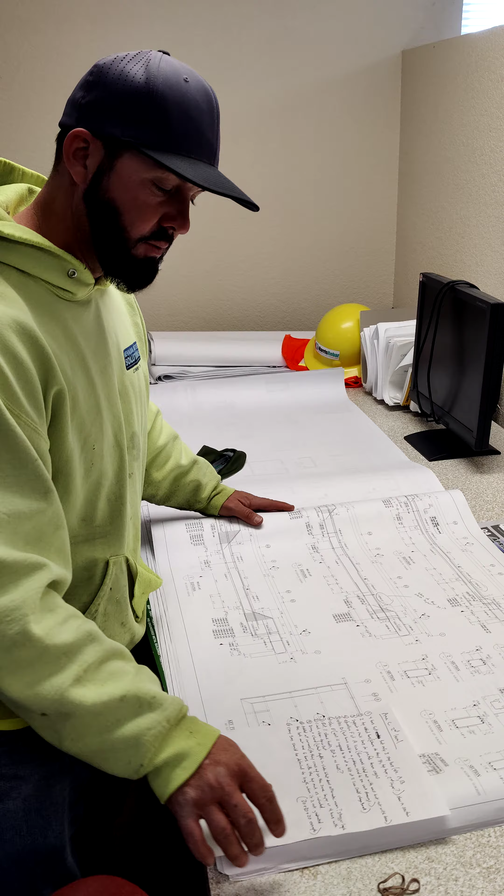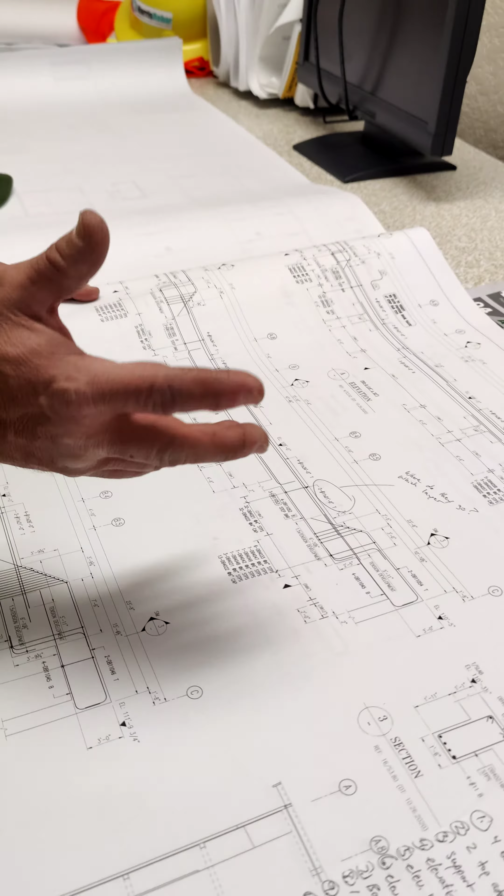We're looking at Area C second level deck. Just some things that I'm noticing on these drawings. The first one is on beam elevations A and B. We're calling out 3 step bars, but we have 4 bars in the bottom. I'm sure you guys are right. Just something I noticed. Want to make sure that that's right.

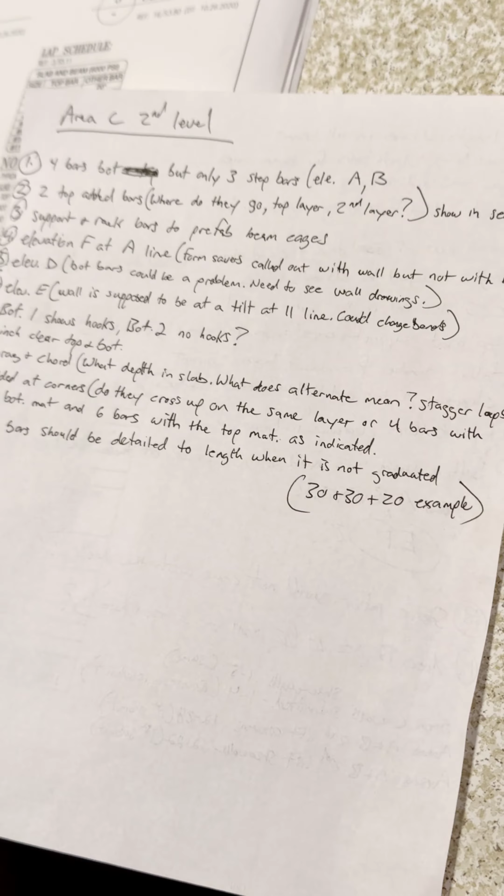The other thing is these added bars that we're calling out in the top. All these things are similar to the last video for A and B. Like, where do these 2 number 11s go? I look at your section cut and I don't see them there. So do they go in the same layer as those 4? Do they go underneath as a second layer? Just something that needs to be put in the section cut so that I know where they go.

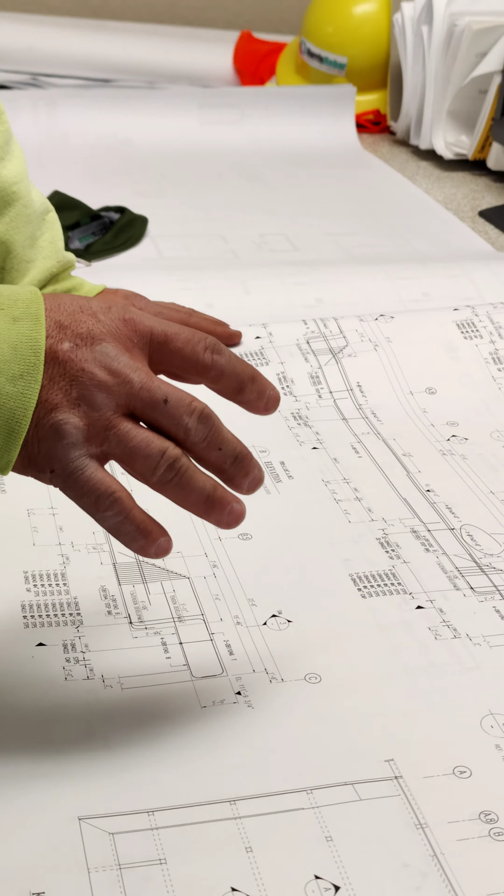Every time we have beams, especially when they're a stirrup and cap, we're always going to need support bars to build the cages and rack bars. So 2 rack bars for every beam cage, and then some number 4s or number 5 support bars, 4 per cage. Similar to what we did at the sphere. Same thing should be for A and B, and that's pretty typical.

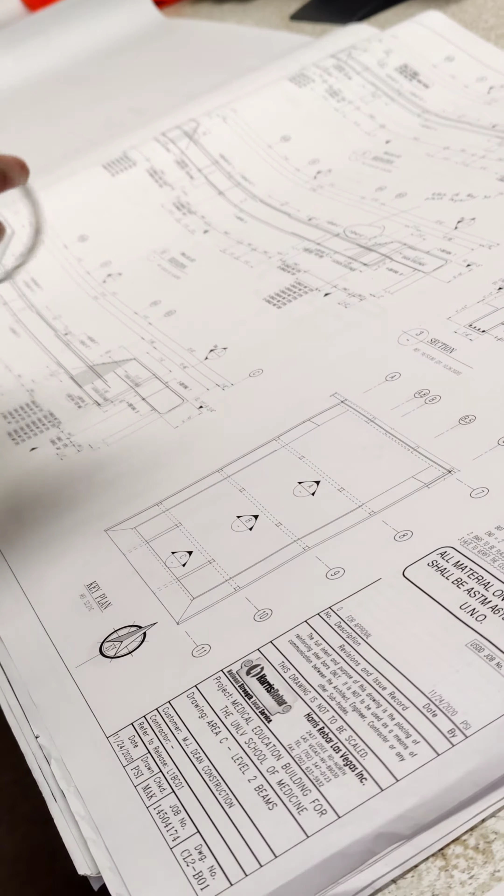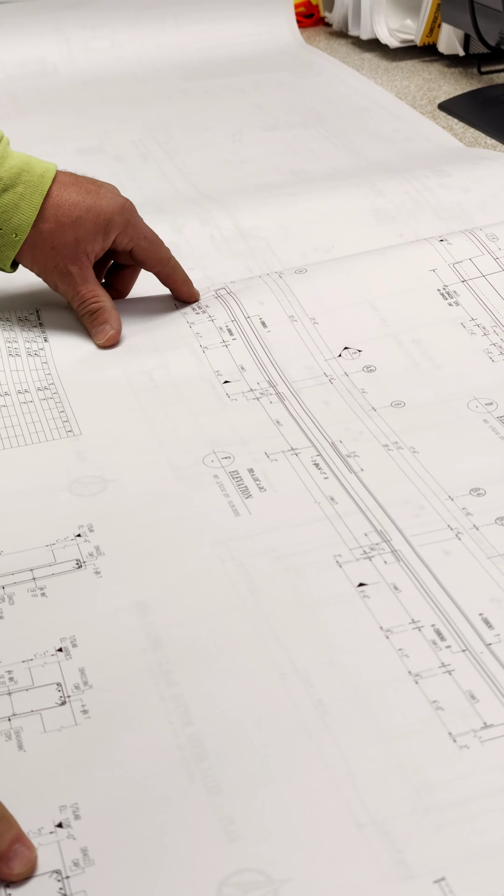So when I look at elevations F over here right at A line, on the wall drawings you guys are calling out form saver bars for the deck and for this beam, but on this drawing you just give me right angles. So I'm kind of confused as to what needs to happen there.

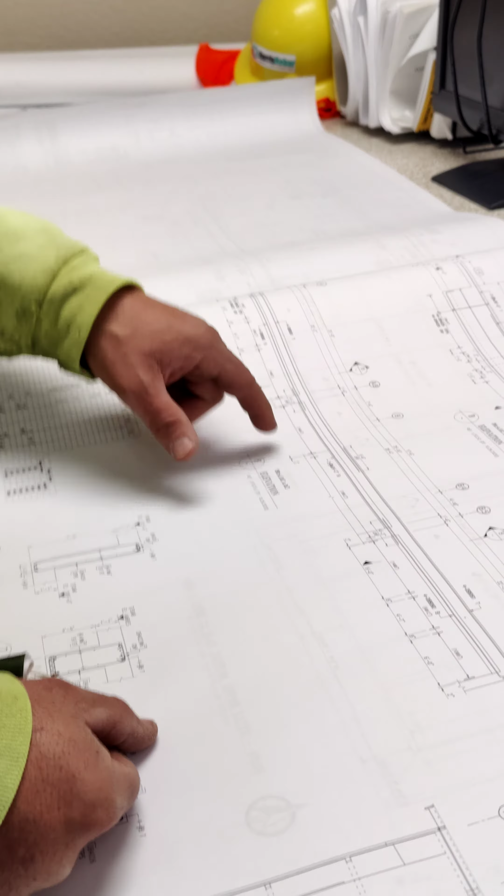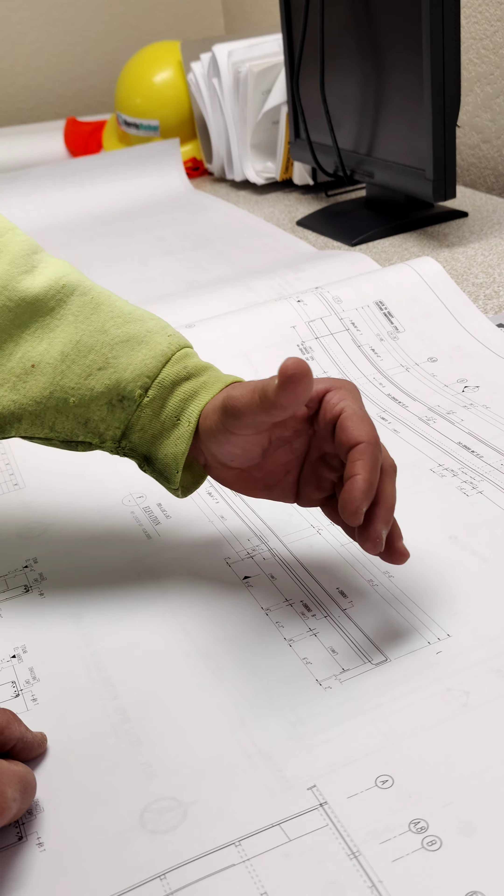The other thing on the beams that I'm noticing, I believe all the ties on the jambs and the horizontals in the wall on F line, for example, if this beam is 2 feet thick and it's running all the way across there, those ties and wall horizontals should stop at the bottom of the beam, unless the engineer is specifying that they need to carry into the beam, which wouldn't really make a lot of sense. We'd want to stop them below that. So I do need some clarification on that.

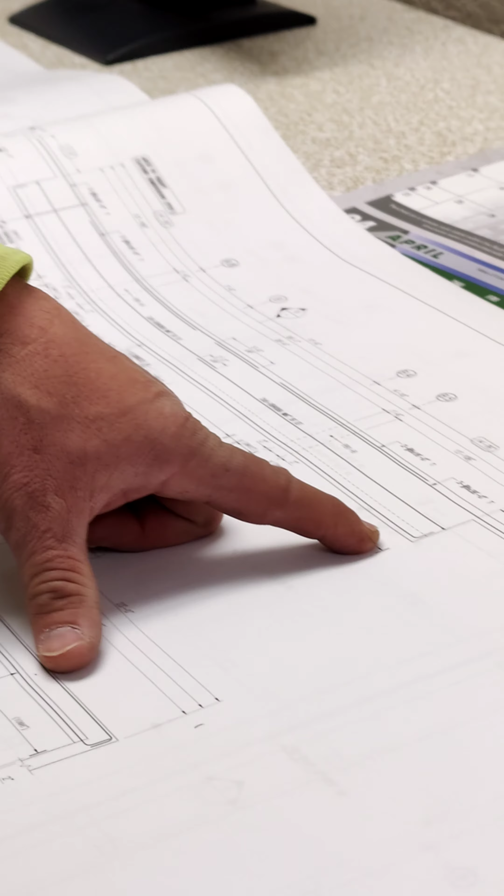Elevation D. Elevation D, you give me these 1-piece U-bars again in the bottom. I don't have the wall drawings, so I don't know what it's gonna look like, but these 3 bars could be a problem. There's 2 columns they got to go through, and it might be hard for me to get those in, or it might not be possible. So that's something to think about.

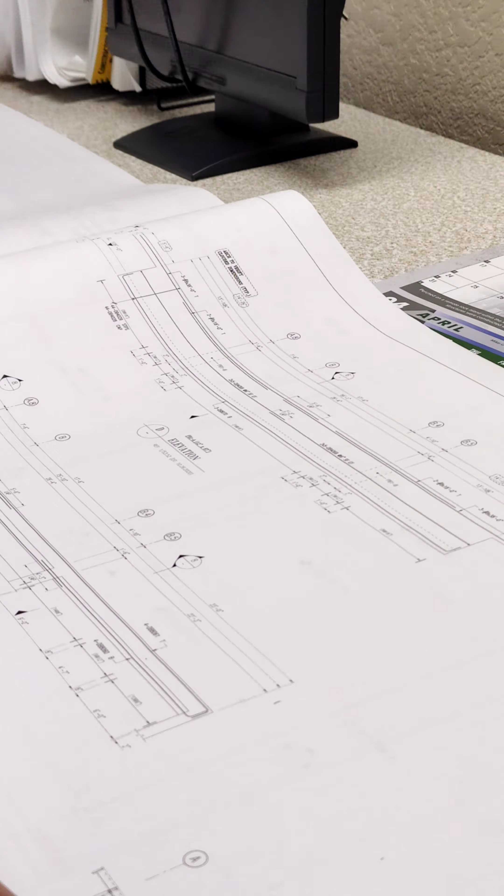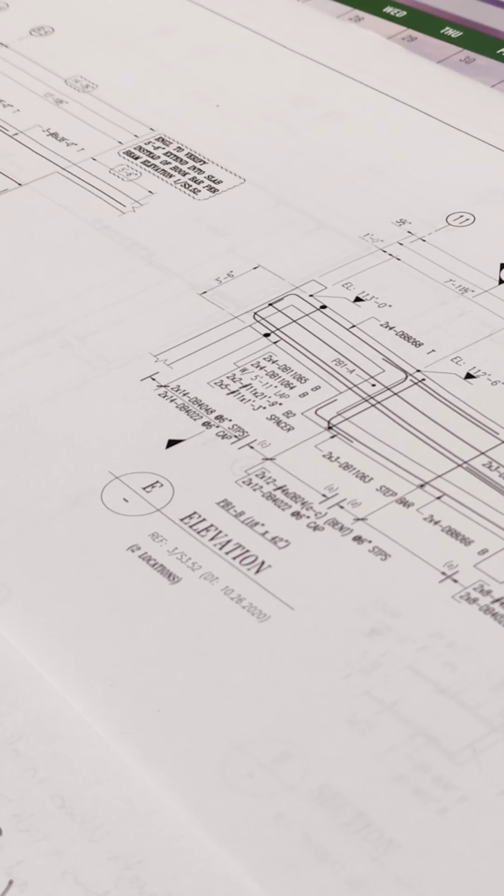The other thing I noticed in this elevation E, the wall that's on 11 line, that wall is supposed to be at a tilt. And we're showing it like it's at a 90-degree angle. That would affect the bends on these bars. And again, this is just me looking through it. Maybe I'm wrong. Maybe it's tilted coming out of the ground and it straightens out. Just something to look into if it is tilted.

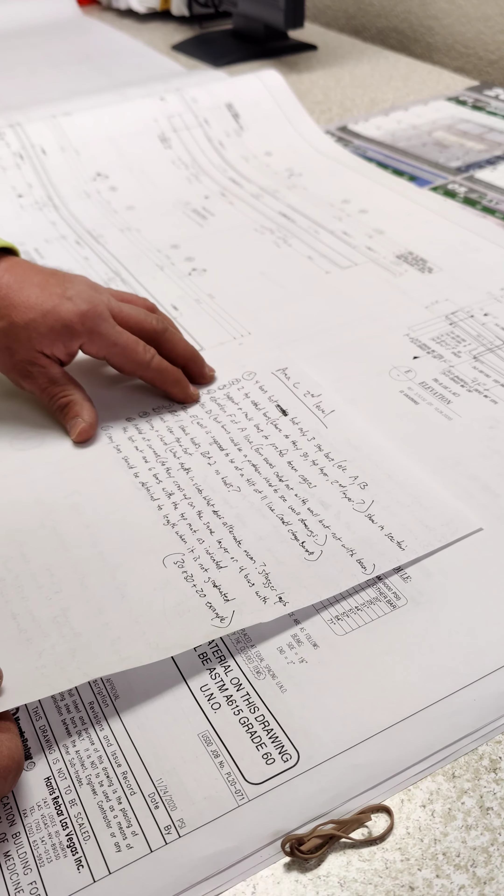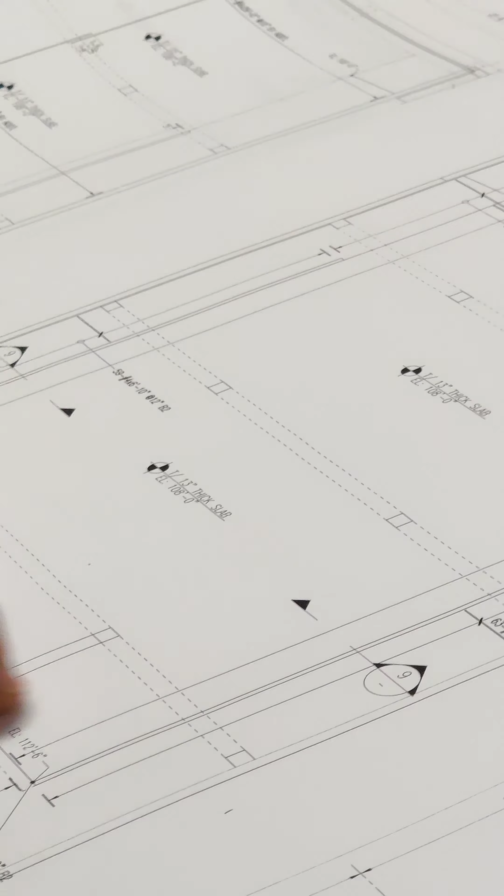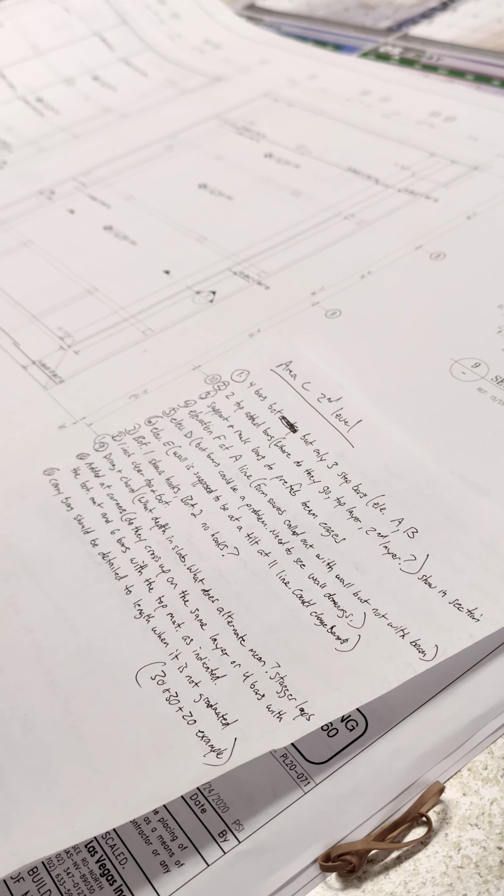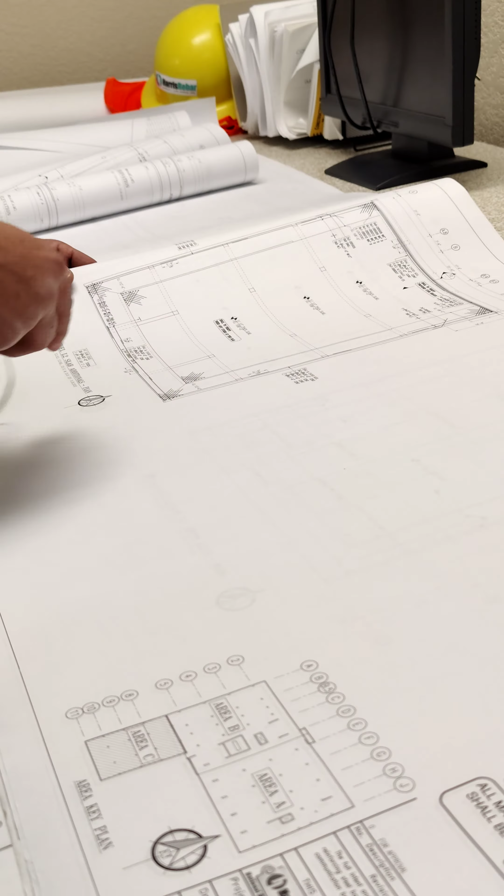The same thing with the drag steel and chord steel. You guys give me the call out, then you say place, alternate. What does that mean? Does that mean to stagger them? I'm not sure what that means. And again, I should have a section cut showing me the depth. I'm assuming it means stagger them. Otherwise, I don't know what you mean by alternate. One on the bottom mat, one on the top mat.

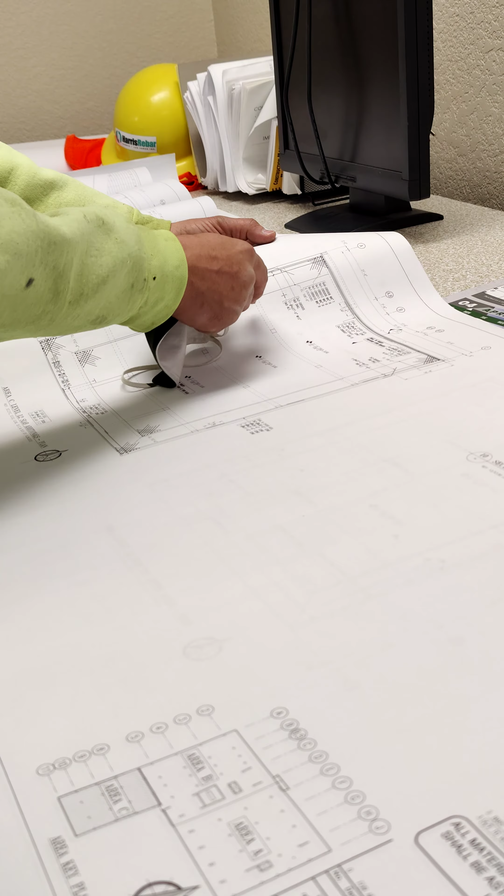I don't know. This corner detail, again, a little cut of this or a plan view of just this calling out. I can figure out which bars go where, but that's because I'm just figuring it out. It's not because you're telling me, because you just have one line going to one bar and then you have multiple bars called out. But more than that, you have B on 4 of these bars.

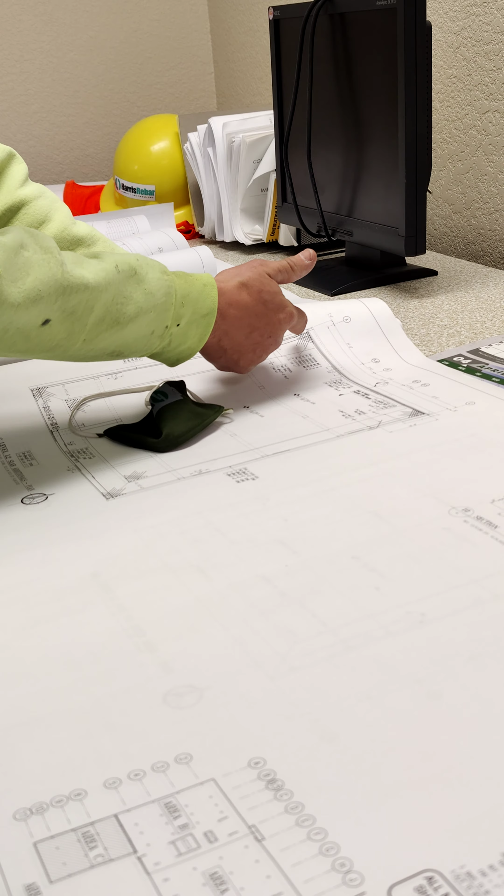So when I look at this, if I place this the way you have it drawn up, the first 4 bars that are going to go on the bottom are the bars running where you can see you only have 4 bars. That's just going to be on the bottom mat. And then on the top mat, I'm going to have these other 6 going the other way. Is that how it's supposed to be? Or are they supposed to cross each other up on the bottom or on the top? It's not clear.

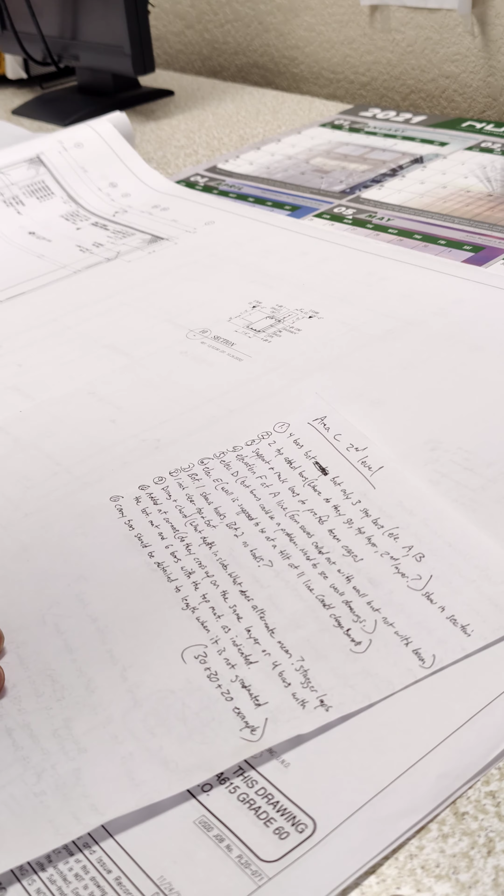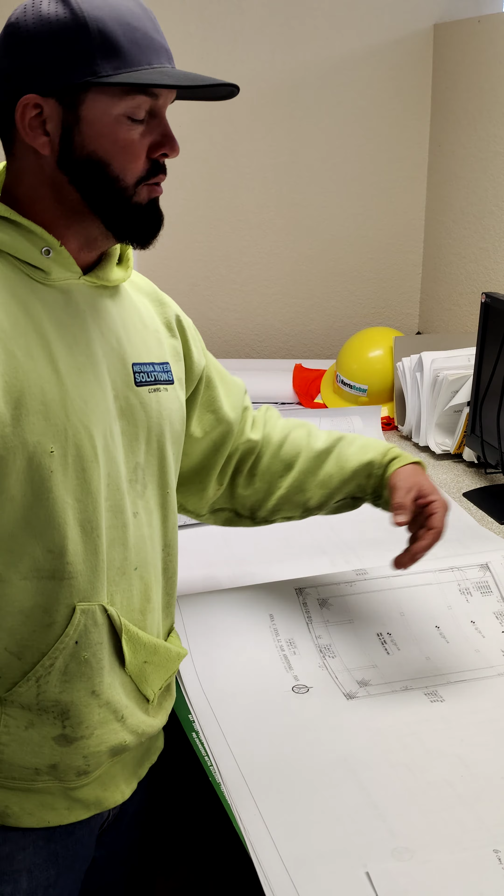And then again, just the carry bars. When we can, give me 30-30 plus whatever the splice is, so we don't have to cut them. If it's graduated or it's really cut up, then yeah, we'll cut some. But otherwise, we don't like just to stock 30s and have to cut them up there. If you could have gave me 20 bars across where it was a 30, a 30, and a 20, just give me the splice. And that's about all I have, guys.